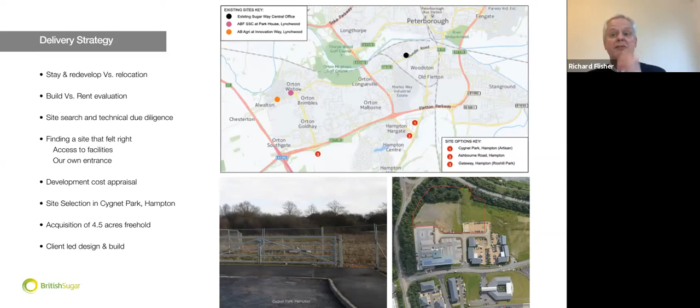Some of the design principles associated with that were actually used to inform our choice of sites. We looked at several sites along the way. Those principles were that it should have views as good as possible, access to lots of fresh air, to daylight, and to enjoyable outside space, space you could actually use rather than simply look at. So we looked at several sites on the south side of Peterborough, as identified here, and we settled on Cygnet Park because it best met these requirements.

It had great views to the lake to the east. It was a relatively quiet setting, suitable for a building with lots of opening windows and big sliding doors, which is what we had in mind. And it had a mature green backdrop that you can see in the image in front of you, which we could enhance to create attractive green spaces outside and walks around the site and beyond to the lake on the other side of the road.

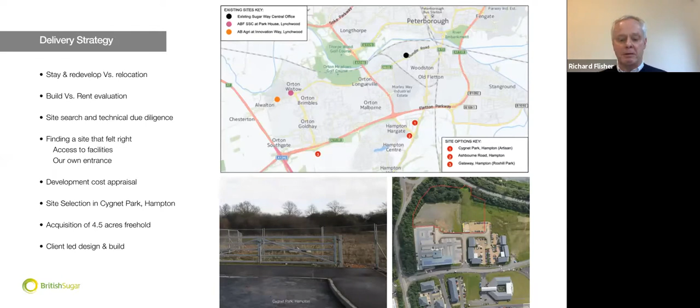If we move to the next slide, one of the other things we liked about this site, as you can see in the plan on the screen, was that the Highway Authority allowed us to create our own new access onto the A15, meaning the site would be like our own little world, rather than coming through the business park past everybody else. You could come straight to where you wanted to be, which was nice.

And we used the spaces between the building and the tree belt where they were ideal. So we used them for creating usable external landscaped areas that people could flow in and out of the building and use. As you'll appreciate, in any office building, control of the internal environment is hugely important.

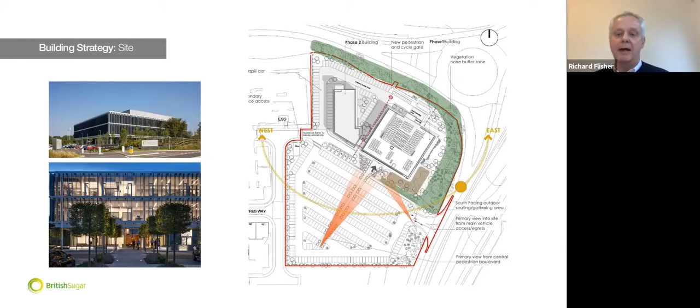So that's enough on the site. I think I'll hand over to Teresa now to talk in detail about the interiors. Thank you, Richard. Hi, everyone. So I'll talk you through the whole development of the design for the interior of the building and how we worked alongside British Sugar and the team.

So we understood, following the brief that Peter described earlier in the presentation, right away that it was going to be pretty much a people-focused approach, with a very important aspect of focusing also on the work culture. So we conducted a very big engagement session. We ran questionnaires, we had interviews across all sectors of the business.

We conducted surveys. We also took the client to other project visits, so they could kind of almost pick and choose what would work for them and what they would like to change and implement in this transition. Because it was not just a transition from an old building to a new building. It was, as Peter said, a big cultural change that was going to be put in place.

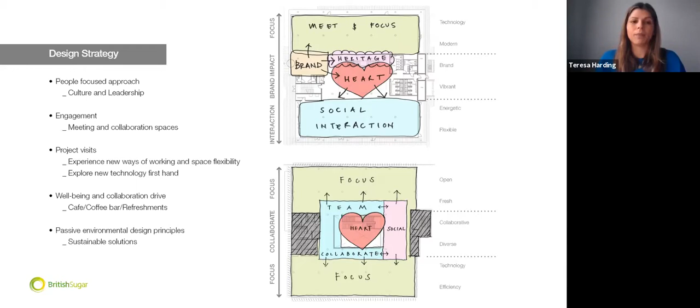If you look at the bottom schematics, this reflects the work floor, so the first and the second floor. And again, you see that heart still there because we did want that to transmit across everyone and all businesses. And then we still wanted around that area to provide team and collaborative areas which were lacking in the previous building. We still wanted to have an area to socialize. But then in this one, you see that the focus area, so your traditional setup of the desking area, starts to take up a bit more space. If we go on to the next slide.

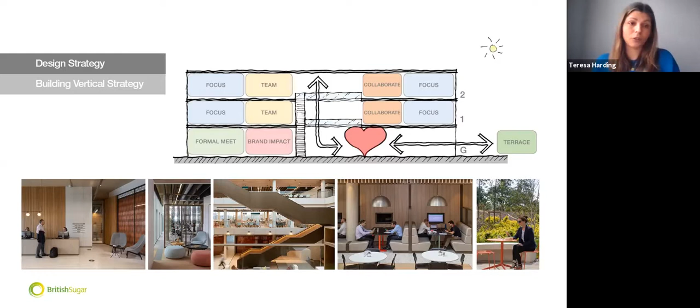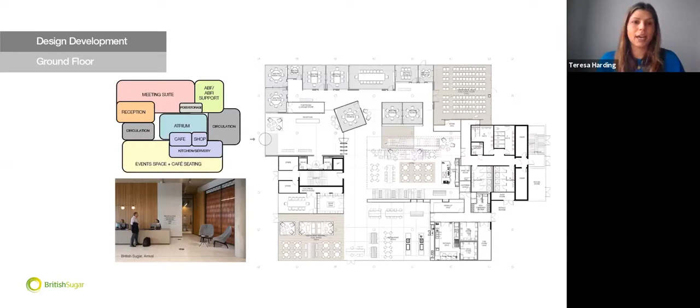And also to highlight, you have a fantastic staircase that spans from the ground all the way to the second floor. This was designed by CPMG in collaboration with us, so everything would integrate within the same design and ethos. And I think the staircase is quite important because it is the physical presence of that connection link that gathers everyone, as Peter said. So it's 5 businesses under one roof, connected by an atrium and the staircase that brings them all together. And we can go now onto the work floors.

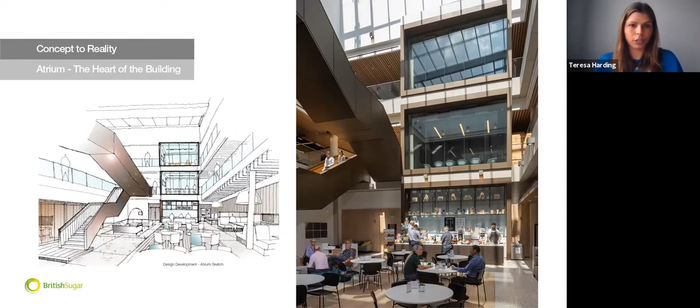So if someone comes into the building that works for British Sugar but does not have a permanent base such as a desk in the building, they still have a sense of belonging, and they can touch down in these areas, pull out their laptop and work within their teams. From this central area that has a bit more buzz and energy, then you start to move into the periphery of the building, into the open plan setup, a more traditional one with the desks, different configurations. We provided storage facilities as well.

And then here, the desks going into the periphery felt quite right because it becomes more quiet, more focused, and then you benefit from all the daylight and the landscape views, which are conducive of a great work environment. Like any business, British Sugar also had requirements for some private meetings. So we provided meeting rooms dotted around the space. We also provided some smaller rooms, quiet rooms, phone booths, where people can go and take a private phone call

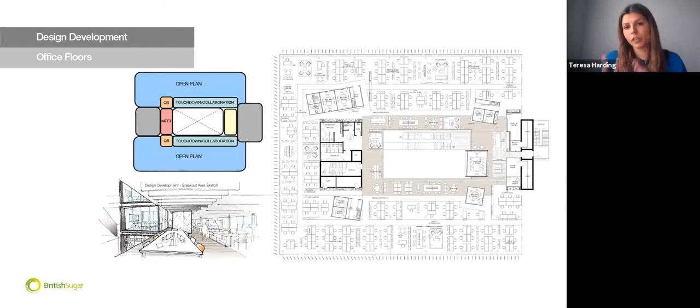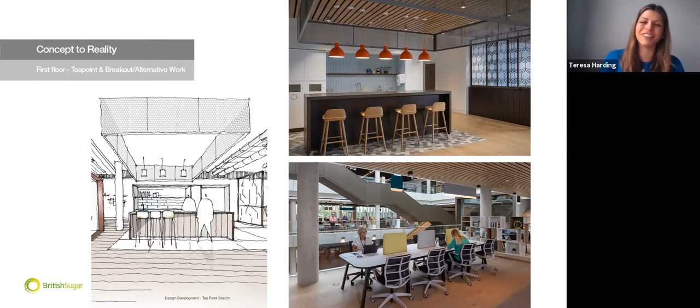The bottom image then shows you those collaboration and team areas that I was talking about. So it is all flexible furniture. It can all be interchanged as well. This was all set in magnetic timber floor as well. So future-proofing if the work practices change, or if British Sugar wants to change them for any reason, you're not fixed to a layout or a type of furniture that can only work in a certain way. So this can always be reconfigured and changed. And it did prove quite useful in the current times. On to the next slide, please.

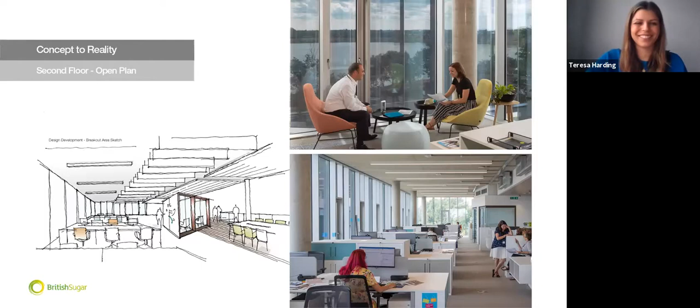Thanks for coming. So I'm going to talk about the most exciting bit, the M&E strategy, and focus on how we met the client's brief, which was to deliver an uncomplicated system, and a system that was really led with well-being-led principles. So every decision was made on how it would benefit the occupants. So as a team, we looked at a passive house principled approach to the entire building, which for us means making the building fabric and structure do as much work as possible in terms of achieving comfort, so there's less for the artificial services to do.

That makes the building inherently low energy, but it also makes the building more cost effective because the service installation is less intensive. And it also makes the building very flexible because there are less services to move if the function or the layout of the building changes. So we designed the building envelope generally to passive house standards, with the notable exceptions of the air tightness, which was still pretty good at just under 3, and the glazing. Because of the amount of glazing we had on the building, passive house levels of triple glazing would have tested the budget. So we used very good double glazing with a U value of 1.2 instead.

Another key passive house principle is mixed mode ventilation, and delivering openable windows and swathes of fresh air was a key part of the client brief. And that's also a nod towards BCO approach in terms of giving control of ventilation back to the building occupants. So the whole building perimeter has got openable windows which work in tandem with the mechanical ventilation.

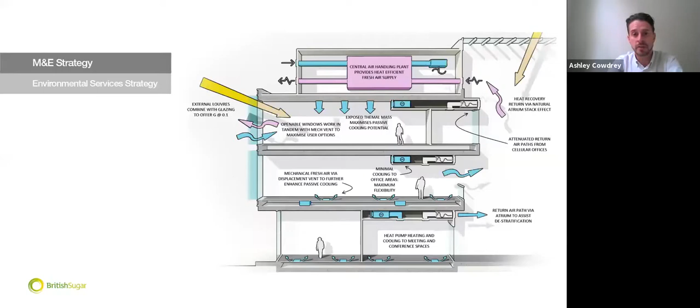So the fan coil unit installation was really limited and only limited to central bulkhead areas, which meant that the general aesthetics and the exposed mass principles of the building didn't have to suffer at all. Hopefully you'll see that on the next slide.

Okay, I'm going to hand you back to Peter now, who's going to talk a little bit more about how we delivered this system. Peter? Thanks, Ashley. I'm going to keep this relatively short. I think you've heard the story a little bit about where we've come from, what we were trying to set out, and Teresa, Richard and Ashley have explained that journey along the way.

You won't be surprised to hear from me that actually it did deliver. It delivered probably more than we thought, undoubtedly more than we thought. We knew we could build a building to house 350 people. What we were truly amazed about was the level of attention to detail and the small elements added up to create a building that not just allows us to be a better business, but to enjoy it more and, without a shadow of a doubt, change the culture of our business.